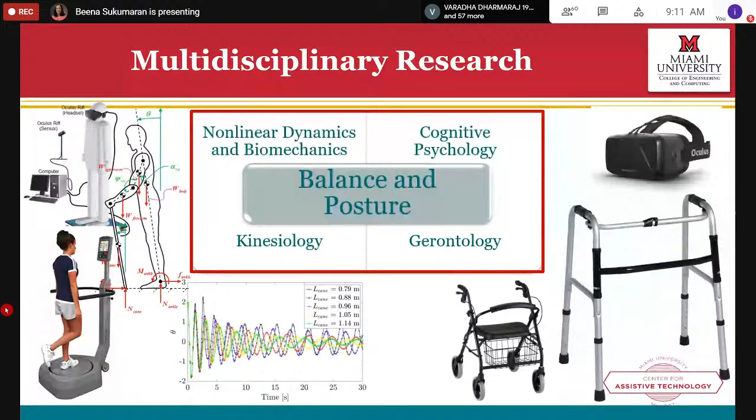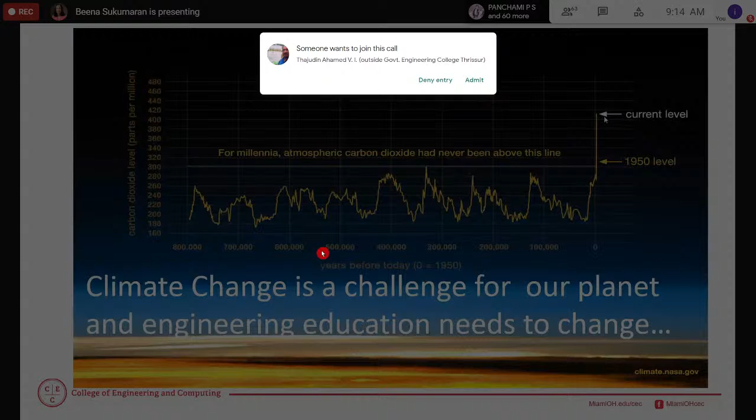So just to give you an overview of what is going on with our planet, the temperatures on our planet have been increasing over the past few years, and you can see these are the carbon dioxide levels. What you see here is a steep climb in the emissions of carbon dioxide, and this is from NASA. So you can see till the 50s, we were at a very stable rate, and then you see this huge climb in carbon dioxide emissions. And carbon dioxide being a greenhouse gas, it has caused our planet to warm up. And that is the reason that we see a lot more severe storms, and that is something you can see on this slide here.

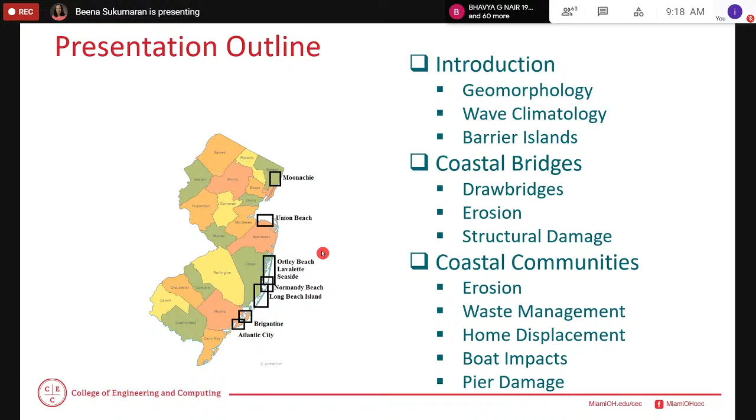But most of the damage was not near the eye of the storm, but in the surrounding areas, because the wind band for the storm was huge, and you can see that from the satellite image that you saw earlier. So if you look at the coastal hydrodynamics, it varies along New Jersey's coastline. There are 3 wave zones that you see. This is the southern end of the state, then this is the mid portion, and then the northern end. And here you also have these little inlets that go in.

And in fact, some of our team was concentrated in New York, both New York City as well as the surrounding communities. So the coast is divided into 3 zones of different wave climatology, and you see different levels of damage as a result of the storm surge. Ocean County, which is in the middle here, received a greater portion of the waves, which arrived directly onshore from the east and southeast. And it corresponded with the damage patterns that you see in the report.

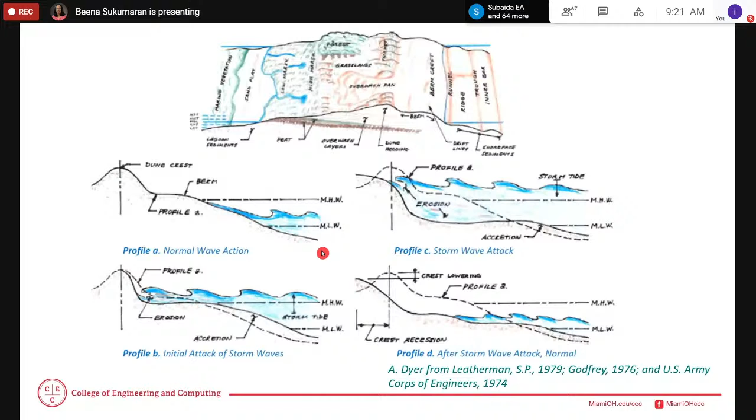So you can again take a look at the waves; this is normal wave action that you see. And then the storm actually coincided with high tide. So you had a huge storm surge, which caused a lot of erosion along the coastline, and as a result, collapse of some of these sand dunes along the barrier islands. And that is where we saw a lot of damage. So you can see what the tidal surges here are.

I hear a bit of noise in the background. Ma'am, someone has switched on their mic by mistake. Okay. We'll be asking them to switch it off. Okay, thank you. Ma'am, please continue. Sorry for the disturbance.

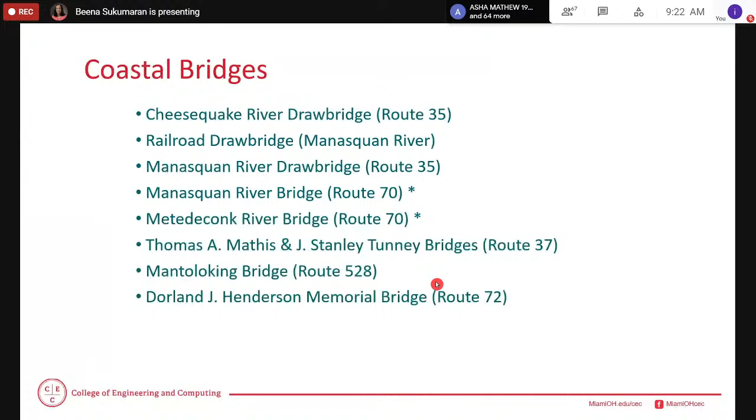So these were some of the coastal bridges that we visited. They were a mix of drawbridges as well as other bridges, and I'll talk about some of them. The reason that we visited the bridges is because bridges are lifeline structures. They connect communities, and if the bridges are destroyed, that means you can't provide emergency assistance. And so these tend to be critical structures that we have to be careful about.

So I will start with the Cheesequake River Drawbridge. This is on Route 35, and I know this doesn't mean much. It connects 2 communities called Sayreville and Old Bridge. And it was one of 8 bridges that we visited. The recorded storm damage was collected by the New Jersey Department of Transportation.

The barrier gate arm also had some damage from the wind, and it underwent a $25 million restoration project, completed in fall 2013, which included repairing the bridge decks, the side walls, the railings, and the median. This was the second bridge that we visited.

It's a railroad drawbridge, and it crosses the Manasquan River, connecting the communities of Manasquan and Brielle to Point Pleasant Beach. This bridge is at a relatively low elevation, with its stringers actually 3 to 4 feet above the water.

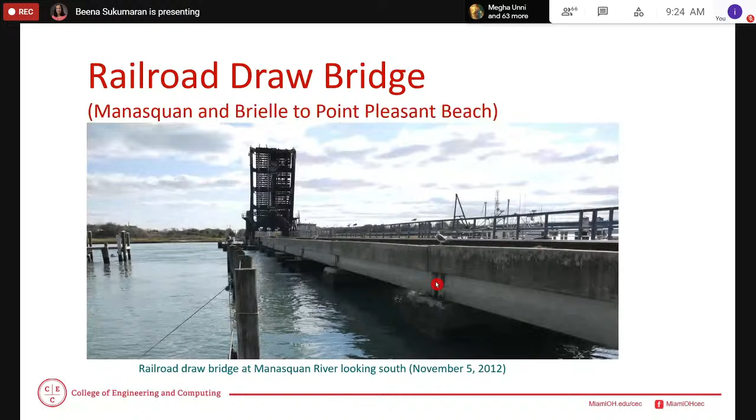Our team only assessed the north abutment and found that there was no structural damage. However, based on the surrounding piers, it was suspected there was moderate flood damage in other areas, but we couldn't visit the whole bridge because we were not given access at that time.

We also visited the Mathis and Tunney bridges, located in a township called Toms River, spanning Barnegat Bay to Seaside Heights. Mathis Bridge is a girder bridge with a drawbridge at midspan to allow for ship traffic. It was closed during the visit due to electrical damage to the drawbridge, and it was also missing a bearing from one of the stringers.

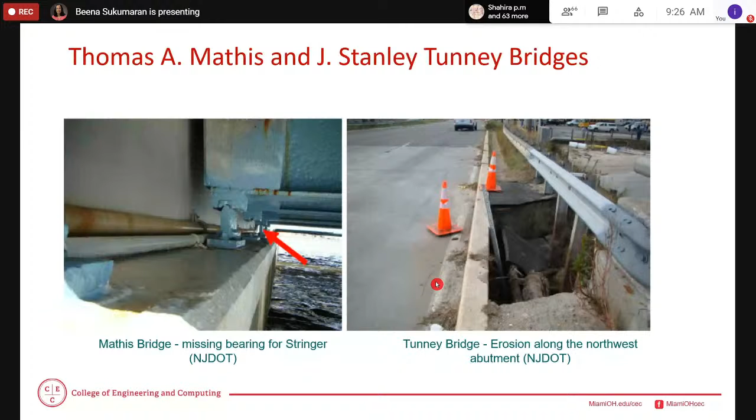The Mantoloking Bridge was the one that was severely damaged. We could not visit it because it was not safe, so these pictures actually came from the county itself. The substructure for this bridge, each foundation, is 5 concrete-filled pipe piles. The superstructure was a reinforced concrete slab, and 2 steel sheet pile coffer dams support the bascule piers.

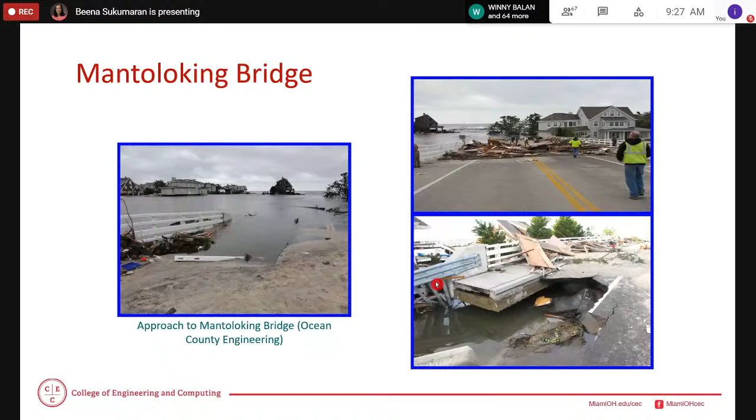The breach here opened up between Barnegat Bay and the Atlantic Ocean. You can see the extreme flooding, erosion, and large floating debris, which caused the loss of the T-wall as well as the destruction seen in this bottom right figure. This was a bridge that had to be completely rebuilt.

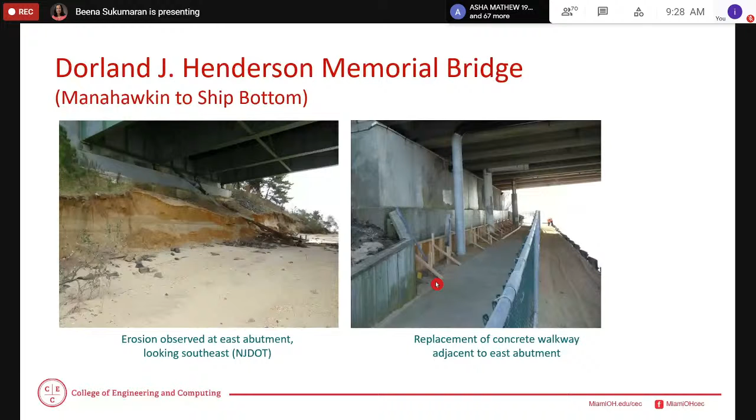This was another bridge that we visited. It's a steel precast concrete bridge on concrete abutments, with some portions supported by timber pile bents. This suffered significant damage on both east and west abutments, but it still did not undermine the whole foundation. So it did have some erosion damage, but all it required was some reconstruction of the walkway, some repair of the abutments, but no major structural damage.

We also visited lots of coastal communities. In fact, I visited some of these after the team had left also. I started with Atlantic City, which was very close to where I lived, so I went down there first.

In Atlantic City, we have a boardwalk along the beach. You can see this was already damaged even before the storm, but what the storm had done was taken some of these sections out. The high water mark here was about 2 meters above sea level. The bulkheads run along the section of the shore, and it had been breached in 3 locations.

The bulkheads that are used here are wooden bulkheads with tie rods that are attached to deadman anchors, and the pilings for the bulkheads are at 5 feet intervals.

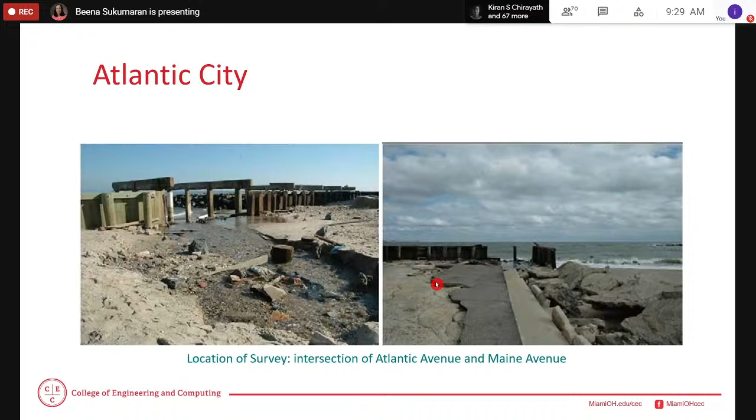The breaches resulted from damage to the facing and the piles, which had been washed away. As a result of the storm surge and water washing in through the breaches, the tie rods and the dead man were exposed and severely corroded. You can see some of the severe corrosion that happened here, and what it has done—it has undermined this whole area, causing sinkholes to form and some natural demolition. The ocean took away some of these portions here.

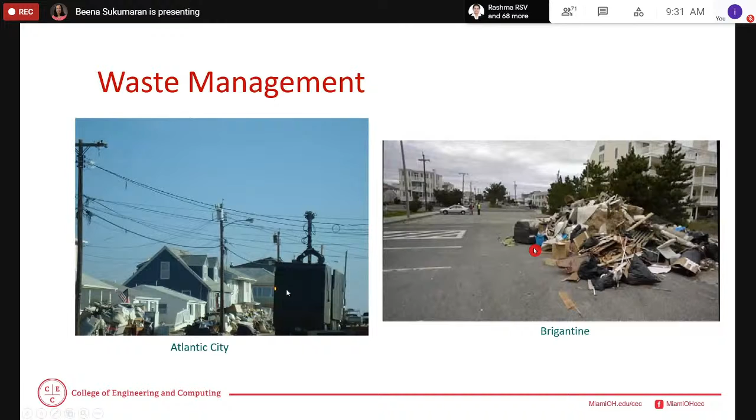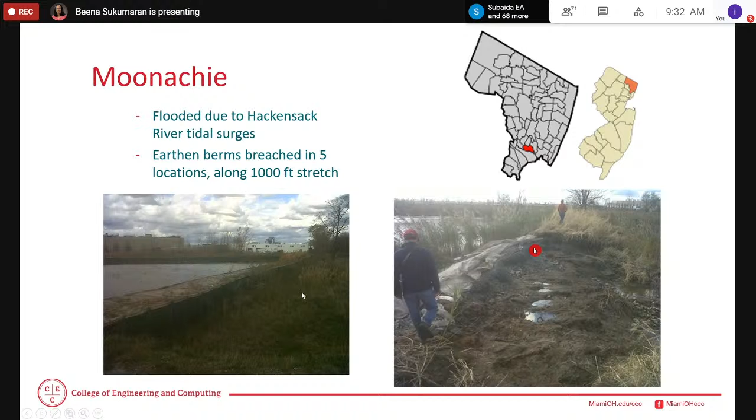Moonachie is an area that is actually interior, not along the shore, but along a river. Because of the storm surge from the ocean, the water in the river backed up, causing flooding in the communities around the rivers as well. You had earthen berms that were breached in 5 locations, and a whole community here had to be evacuated because of these breaches.

The other thing that happened was the pipeline. We had natural gas pipelines along these berms, and the buoyant forces from the water caused these pipelines to float up and rupture. The repair was to place concrete pads to weigh them down so that in future these buoyant forces wouldn't be able to raise them and cause rupture. These are two areas we visited after some time, because we couldn't even access them for a long time due to natural gas pipeline leaks and fires. We could only go here a month after the storm.

This is in the midsection of New Jersey, the area called Seaside, Long Beach Island, in Ocean County. You can see this aerial view of the area and all the damage, especially close to the shoreline. As you went away from the shoreline towards the Bay Area, you didn't see as much damage.

Sand was displaced, blocks from the ocean, and it was mostly on the ocean side. The vegetated beaches actually suffered little damage on the bay side, the opposite side. Soil erosion coupled with storm forces pushed over traffic signals and utility poles, and you can see big sinkholes develop as a result of some of the erosion.

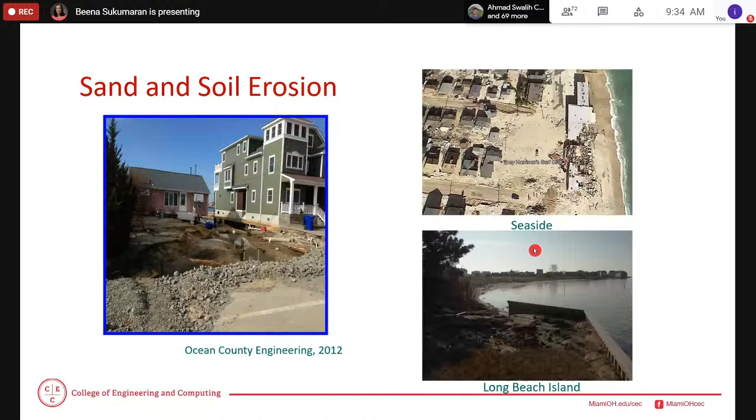In Long Beach Island, soil was washed out from under the sheet piles, and this compromised the stability of these earth walls. These were the kind of damage you would observe in these communities, and these are some of the residential homes you see in this area.

I'm standing here, and this house you see was actually on these piles. It had been sheared off the piles—it was 2 floors, and 1 floor had been completely washed away, and the owner didn't even know where that home had ended up. While this adjacent property withstood the storm with absolutely no damage. So you can see it varied, depending on how things were constructed.

Homes that were constructed on shallow foundations were shifted or even displaced several feet off the foundation. The dynamic water forces destroyed the first floor in many homes and left upper stories intact. In Long Beach Island, in fact, half the homes had flooding and few had very significant structural damage.

So you can see that when you build in these areas, you have to put them on piles. But these piles also have to be designed for sufficient lateral forces such that they will withstand some of these storm forces.

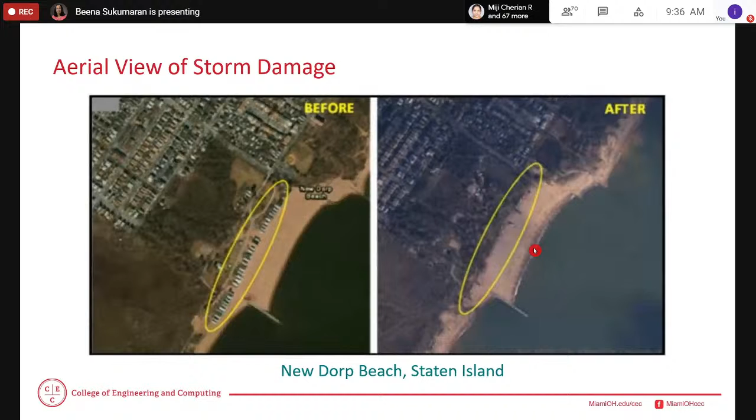The other damage that we saw a lot of is boat impacts. Lots of people have these boats that are moored along the shore, and these had come untethered. So they were just floating around and impacted homes. Some even got wedged between homes, and it caused a lot of damage to the area.

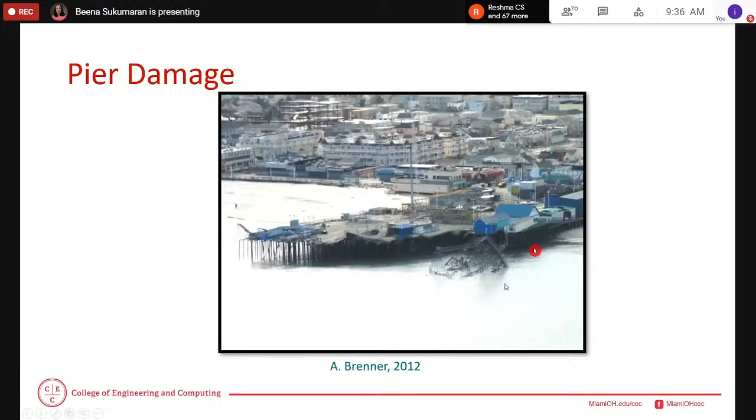This was another one. This is actually an area called Seaside Heights, and this is a very famous pier in Seaside Heights - it's an amusement park. Part of the pier deck was detached, and it was completely destroyed and claimed by the ocean. So some significant damage there.

So just in summary, some of the damages that we observed were: in drawbridges, electrical systems were damaged. There was erosion of bridge abutments. We saw some breaches, pipeline damage, and waste generation - a huge volume of waste generated. Boat impacts was another thing we saw a lot of. Displacement of structures on shallow foundations, and then for some structures, even shearing off pile foundations.

So what are some immediate solutions, especially for a warming planet, as we build along communities? If you ask me, should we have built on the barrier islands in New Jersey, I would say it's not a very good idea, because the barrier islands are almost like shifting dunes. They tend to move as storms come in, and they have a tendency to move towards the mainland. So these are like shifting sand dunes, and constructing on that is not a great idea.

But if you were to do that, what are some of our solutions? For New York City, we are thinking of putting flood barriers, surge-resistant foundations - these are pile foundations, right - and hardening infrastructure. When we talk about hardening infrastructure, we're talking about how quickly can we bounce back after a storm, and how can we minimize some of the damage?

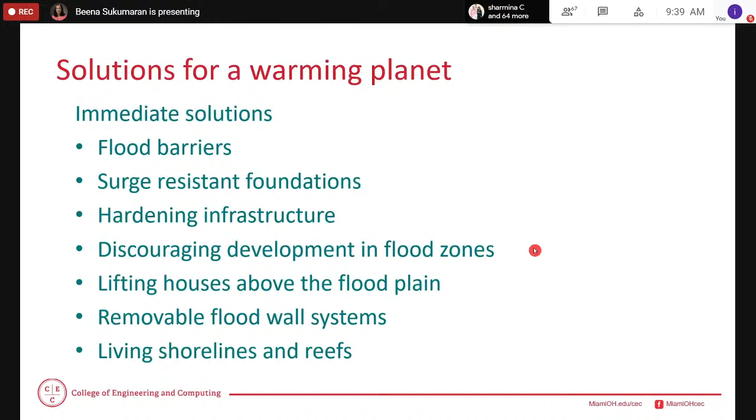Removable flood wall systems - you see that being done in London, in Venice, lots of areas of the world. In the Netherlands, they've had it for a long time. But then, are we moving the problem somewhere else? So the other thought is to have living shorelines and reefs, using natural defenses - are those the better things to do?

Heating and air conditioning units had to be raised. If not, the flood insurance became very expensive. Lots of homes, like I mentioned earlier, were bought out by the government, by the state governments. In New Jersey, it was something called the Blue Acres program.

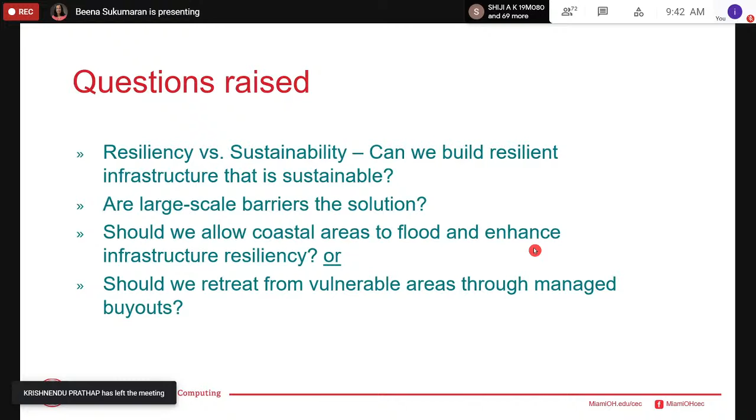And then, are large-scale barriers a solution? I'm not sure if that's the solution because you're just shifting the problem somewhere else. Should we allow for coastal areas to flood and enhance infrastructure resiliency? Or should we retreat from these vulnerable areas through managed buyouts? And I know that in lots of areas, it's not possible to do that, right? So these are questions that we need to tackle.

So with that being said, when we think about educating the next generation of engineers, I would say ethics is a huge component that we should place a huge emphasis on. And the reason is that we want our graduates to speak up and to talk about the impact of climate change and to challenge it. Sometimes you have to challenge political forces and so on to say maybe these are not the best areas to build in. And maybe we need to sacrifice some of that economic development so that we live more sustainably.

The other thing that I think engineers should have are good communication skills. I think those are critical because we need to formulate policy, right? And then, you never stop learning, so you have to be lifelong learners. And as you can see now, because of the pandemic, all of us have become very good at asynchronous learning. So you're learning things online, you're learning things asynchronously from your faculty members as well as from others.

And then I think it's good for you to put things in practice while you're still in school through service learning by helping communities in need and so on. So those are your hands-on and project-based learning. And I'm a big advocate of that.

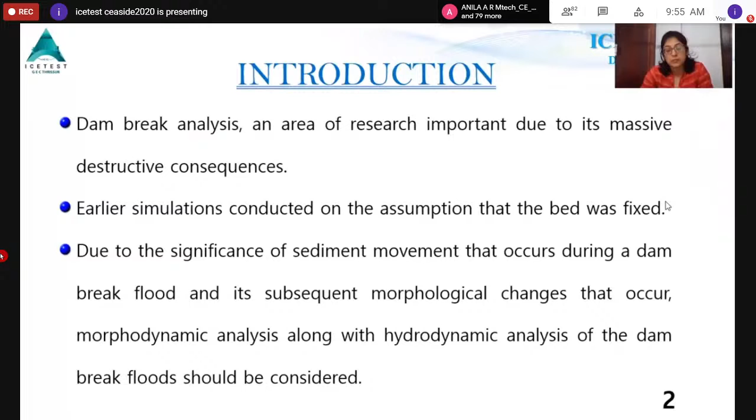Earlier simulations used to be done assuming that the bed was fixed, but due to the significant sediment transport that occurs during a dam break flood and the subsequent morphological changes, morphodynamic analysis is also considered along with hydrodynamic analysis when a dam break flood is considered. Now, for any numerical model, it is necessary that we calibrate and validate it. But dam break study is one such domain where there is very little observed data for verifying it against the actual event that has happened.

So in such cases, we make use of experimental setups to reproduce a scaled version of the dam break incident and then validate the numerical model so that it can be used to forecast the actual event. Now, my study also makes use of an experimental setup that has been provided by Frazao et al. and Wu et al. Frazao and team have provided a benchmark test case for the validation of numerical models doing dam break analysis over mobile beds.

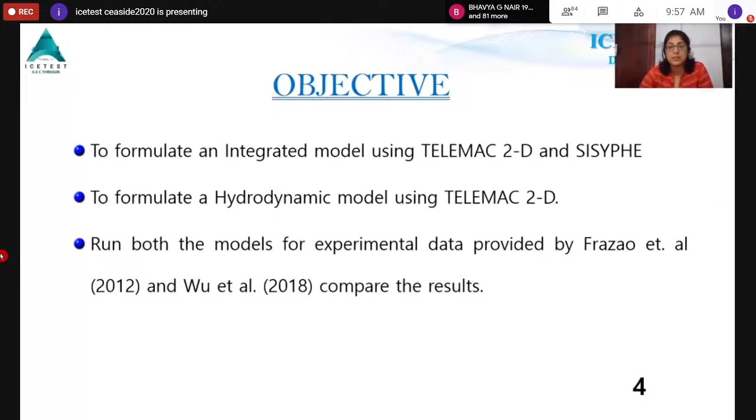My study is an attempt to compare the performance of a hydrodynamic dam break model and an integrated model using this experimental data. After an extensive literature review, the specific objectives formulated were: to formulate an integrated model using the two modules of the TELEMAC-MASCARET software, TELEMAC-2D and SISYPHE. TELEMAC-2D deals with hydrodynamic analysis and SISYPHE with sediment transport. To formulate a hydrodynamic model using only TELEMAC-2D, run both the models for the experimental data provided by Frazao and team, and compare the results.

I'm giving a brief idea about the numerical model and theoretical background behind it. The Open TELEMAC-MASCARET software might be a new name to many. It is a modeling tool for use in the field of free surface flows, written in Fortran with certain scripts in Python as well. There are various modules to it, and I have used TELEMAC-2D, which does the hydrodynamic analysis of free surface flows, and SISYPHE, which does the sediment transport analysis, and coupled them with the inbuilt coupling mechanism in the software for my study.

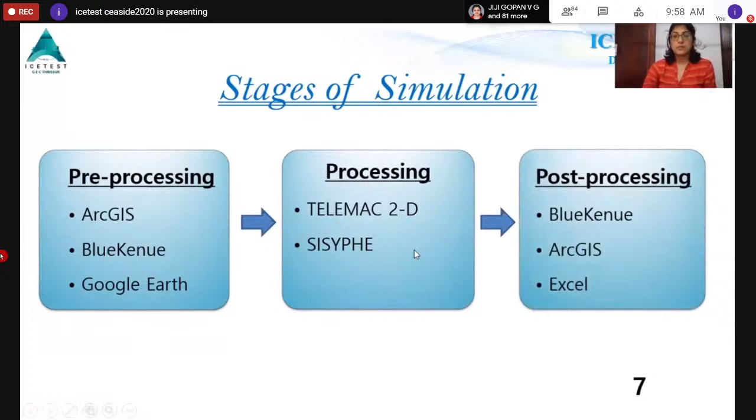Now, the entire numerical simulation can be phased into three stages. First is the pre-processing phase, making use of ArcGIS, BlueKenue, and Google Earth to create the geometry, the bathymetry file, and the necessary input parameter files so that it is ready for the processing phase. In the processing phase, this model is run using TELEMAC-2D and SISYPHE. After that, in the post-processing phase, we make use of software like BlueKenue, ArcGIS, and Excel to do the result analysis as per our requirement.

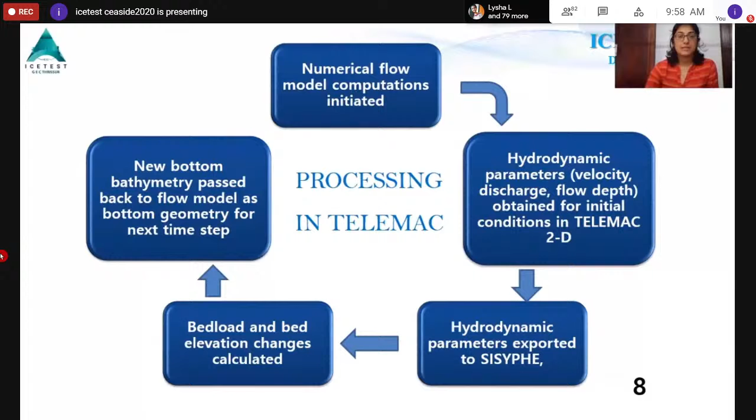Now, in the software, first we initialize these computations with certain initial conditions, and TELEMAC-2D will compute the hydrodynamic parameters and export them to SISYPHE. SISYPHE is going to compute the bed load and bed elevation changes and modify the bottom geometry, and this modified geometry is then passed on to the next time step for the subsequent numerical computations, and this continues until the end of the simulation period.

The hydrodynamic equations used are the non-conservative form of the shallow water equations, and the sediment transport equation is the Meyer-Peter-Müller equation for bed load transport, and bed evolution is done using the Exner equation. Now, the methodology adopted here is first studying the geometry from the paper, and all the data needed for numerical modeling is available in the paper, with the flume geometry, the plan, cross section elevations, and the sediment properties.

The Manning's coefficients adopted, the thickness of the sediment bed, the area where the sediment is located. The dam is represented by a gate that is 1 meter wide in between two impervious blocks, and the upstream of the gate is considered as the reservoir portion, and downstream the downstream area. And all this is modeled in our software as well.

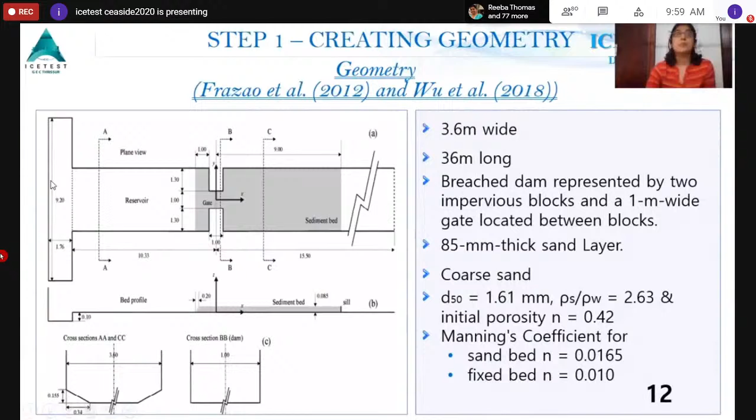After that, there are 8 gauge points located downstream of the dam, which take the measurements of water levels at the end of the experiment. And these water levels are used for the comparison of two models. The dam break wave is triggered by rapidly pulling up the gate for a period of 20 seconds, after which the gate is lowered, and it is done for an initial condition of 0.47 meters at the upstream of the dam and 0 meter, that is dry bed condition, at the downstream of the dam.

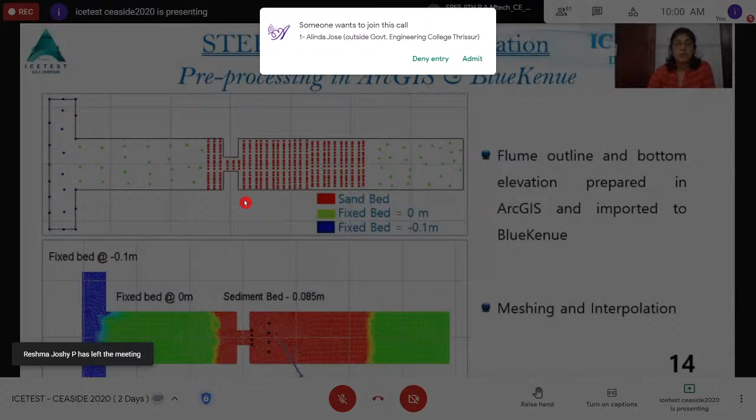While numerically modeling, we do pre-processing by creating the geometry and bottom bathymetry file in ArcGIS, importing it to BlueKenue, interpolating the bottom geometry with the actual bottom elevation with the flume geometry, and meshing the domain. After that, we provide the initial conditions of 0.47 meter upstream and 0 meter downstream, the Manning's coefficient at the sand bed equal to 0.0165 and in the fixed bed 0.01, and the boundary conditions, which are a solid boundary condition at the upstream and free outflow boundary at the downstream.

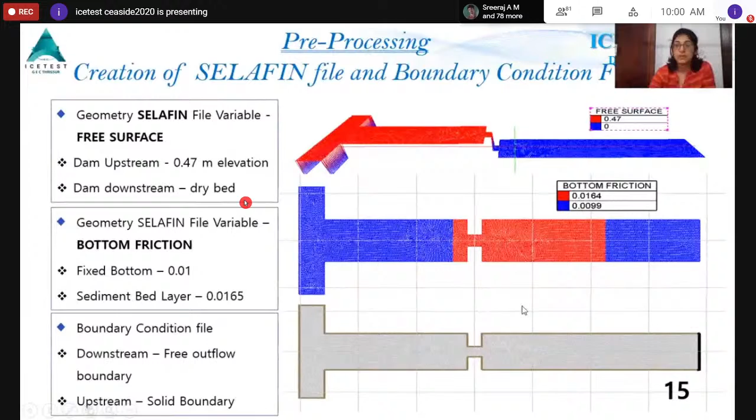So all of these data are compiled into a text file with an extension .cas, and it is run in the Telemac software, which has the MS-DOS command prompt window, along with the command telemac2d.py and the name of the steering file or the input file. After processing, the binary format is available, which can be post-processed according to our requirement.

And for our study, it was required that we compare the hydrodynamic and integrated models by comparing the water levels of both the models with that of the experimental setup at 8 gauge points, as well as the bed levels of the integrated model with the experimental data at 3 longitudinal axes to see if the model is able to depict the morphological changes properly.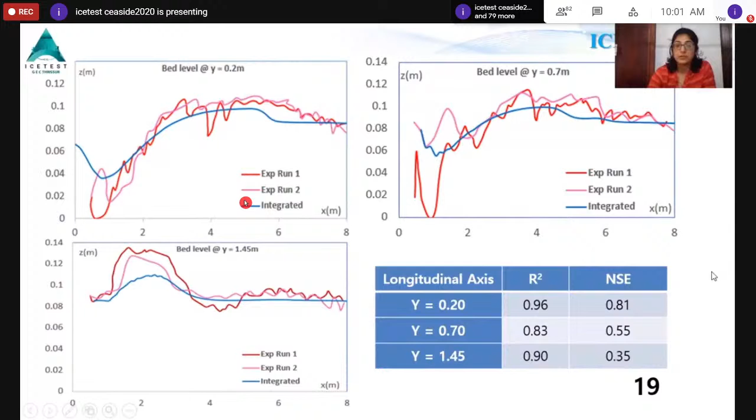Moving on to the water level comparison, which is the comparative factor for the hydrodynamic and integrated model with the experimental data. It is first done at the immediate downstream gauge points, which are 4 in number, and then at the 4 gauges further downstream.

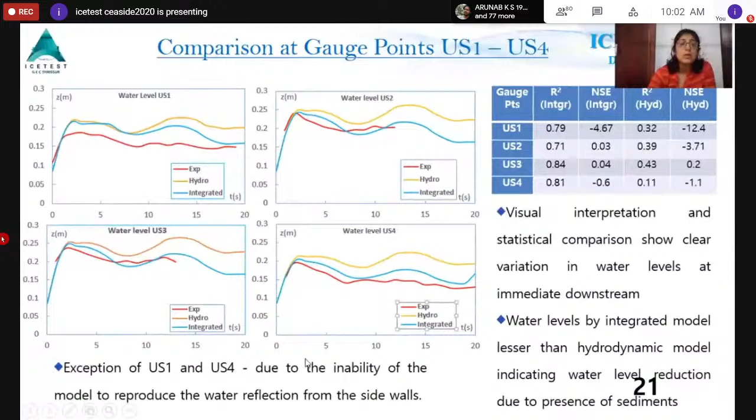And first, if we check out the comparison at US1 to US4, we see a clear overestimation of water levels by both the models. But in US2 and US3, we see that the integrated model is giving a good agreement of result with the experimental setup, whereas the hydrodynamic model in all 4 cases is predicting higher water levels. So the reduced water level by the integrated model is indicating the water level reduction due to the presence of sediments. And for US1 and US4, the exception might probably be the inability of the model to reproduce water reflection from the side walls.

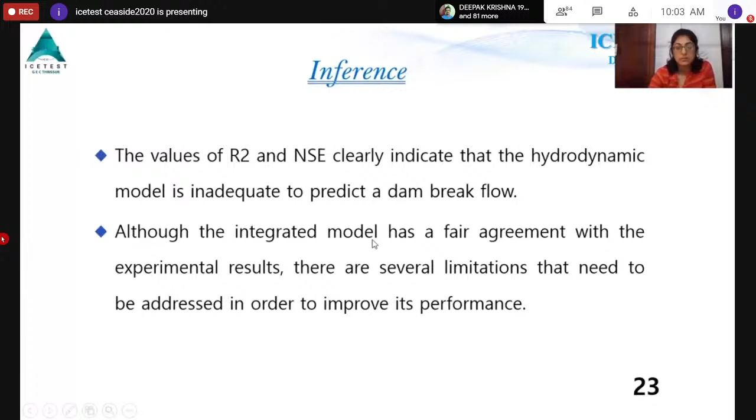Thus, concluding, the study is an attempt to prepare a 2-dimensional dam break model using Telemac-Mascaret software. A hydrodynamic model was formulated using Telemac 2D, and an integrated model was formulated coupling Telemac 2D and Sisyphe.

The integrated model was run using the bed load transport equation with the non-cohesive property of the sediments. Both of the models are able to simulate unsteady flow, but the comparison yielded the result that the integrated model is better performing. The integrated model is also able to predict morphological changes depicting scouring and transport deposition.

Integrated model results are showing fair agreement with the experimental results, but whatever discrepancies can be attributed to the rough calibration of the friction coefficient, Manning's coefficient, which is an indicative value as mentioned in the paper, as well as the bed material sizes, which they say is also an indicative value. Both they have mentioned in the paper itself. This work was used as a preliminary step for the validation study of a two-dimensional dam break analysis using an integrated model. These are the references.

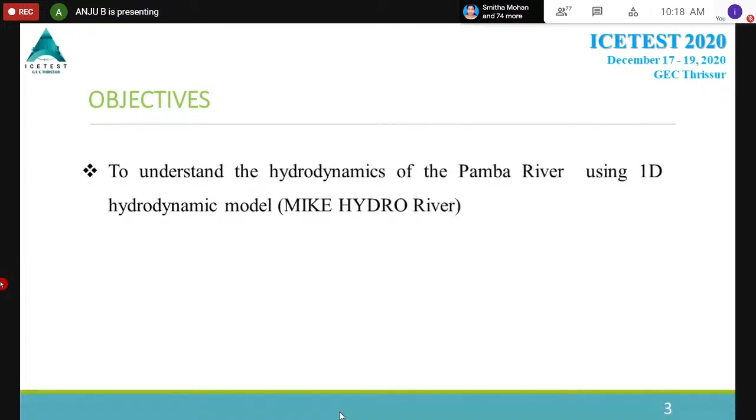Moving to the introduction, a flood is an overflow of water that submerges the land that is usually dry, and it results in large losses and damages. Its main causes are heavy rainfall and human activities. With the extreme shift in land use pattern and rainfall trend, a thorough assessment of flood is necessary. Flood modeling gives the prediction of flood extent and depth, and it gives the assessment of risk to life and property in the floodplain. The objective is to understand the hydrodynamics of Pamba River using a one-dimensional hydrodynamic model.

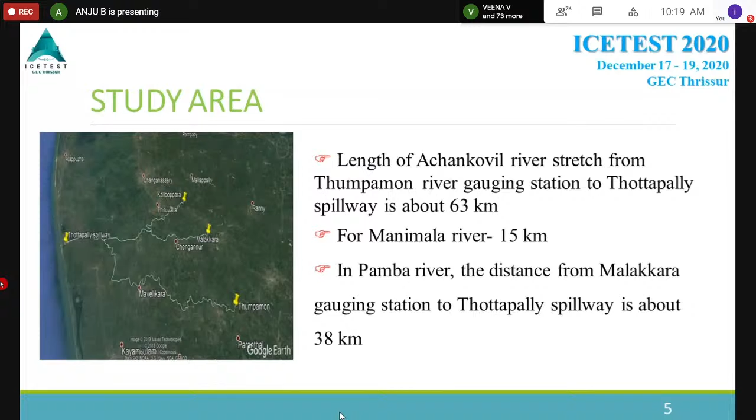The length of Achenkovil River considered for the study is about 63 kilometers, for Manimala it is 15 kilometers, and Pamba 38 kilometers. The data required are time series of daily discharge and water level of different gauging stations, and it is obtained from Central Water Commission. Second is the river cross section, which is extracted from DEM, and SRTM DEM with 30-meter resolution is downloaded from USGS.

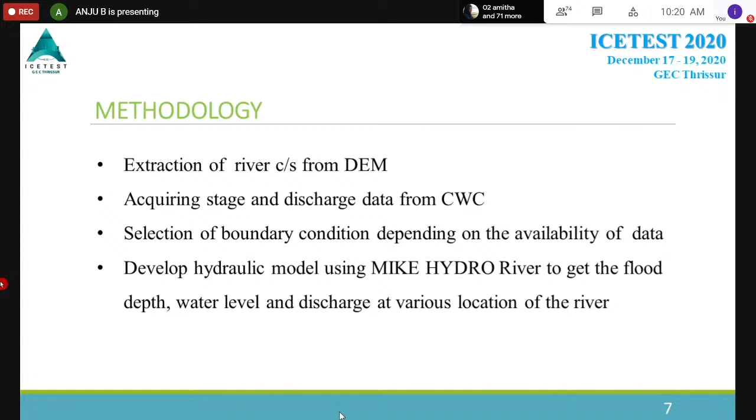Then moving to the methodology. First is the extraction of river cross section from DEM, then acquiring the stage discharge data from Central Water Commission, then selection of boundary condition depending upon the availability of the data, then developing the hydraulic model using MIKE Hydro River to get the flood depth, water level and discharge at various locations of the river. MIKE Hydro River is a one-dimensional unsteady non-uniform flow model developed by the Danish Hydraulic Institute. It solves the one-dimensional hyperbolic dynamic Saint-Venant equations with an implicit finite difference method. The Saint-Venant equations representing conservation of mass and momentum are given below.

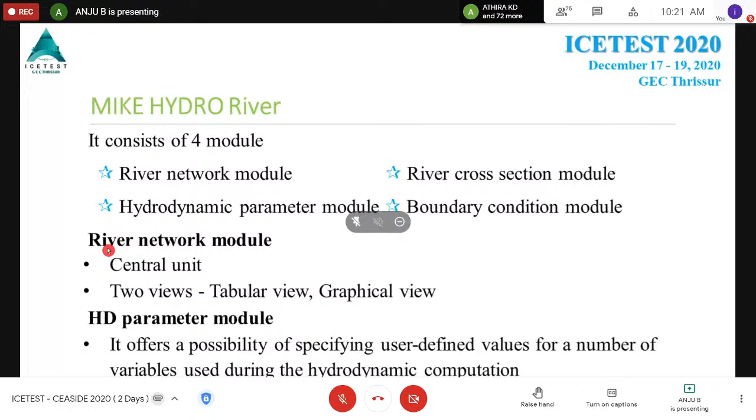MIKE Hydro River consists of 4 modules: River Network Module, Hydrodynamic Parameter Module, River Cross-Section Module, and Boundary Condition Module. The first one is the River Network Module. It is a central unit. It has 2 views, that is tabular view and graphical view. The second one is the Hydrodynamic Parameter Module and it offers the possibility of specifying user-defined values for a number of variables used during the hydrodynamic computation.

The third one is the river cross-section module, which is the most important of the 4 modules, and it has 2 data sets, that is raw data and processed data. The raw data describes the physical shape of the cross-section, and the processed data is calculated from the raw data and contains the corresponding values for water level, cross-sectional area, flow width, and hydraulic radius. The last is the boundary condition module. It requires both time series editor and boundary editor. It also has 2 views, that is tabular view and graphical view.

Then coming to the results and discussions. First is the calibration of MIKE Hydro River. Initially, the Manning's coefficient value is given as 0.033. Then using this value, the model was run. Then the Manning's coefficient is given differently for different stretches of rivers, and the value ranges between 0.03 and 0.06.

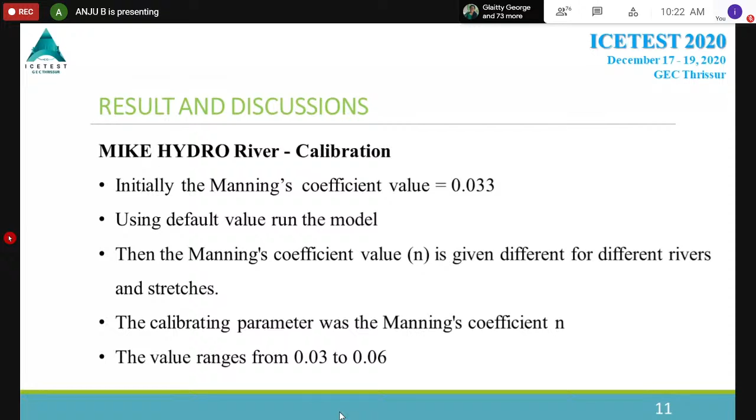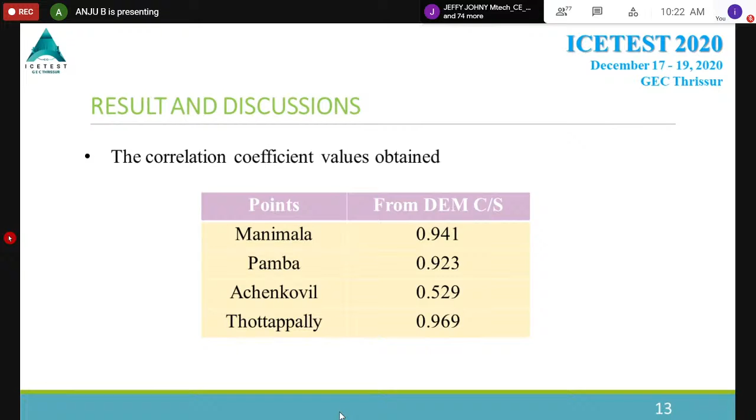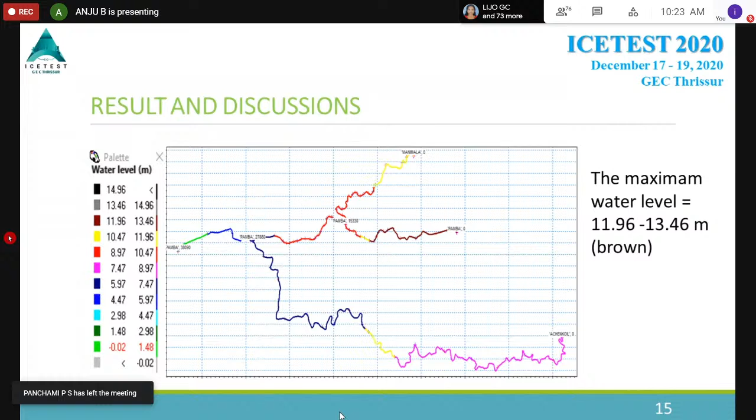Coming to the conclusion, the water level and discharge simulated is satisfactory with the observed values, and the downstream correlation coefficient value obtained is higher compared to the upstream. The variation in the observed and simulated water levels are due to the different datum used for measurement.

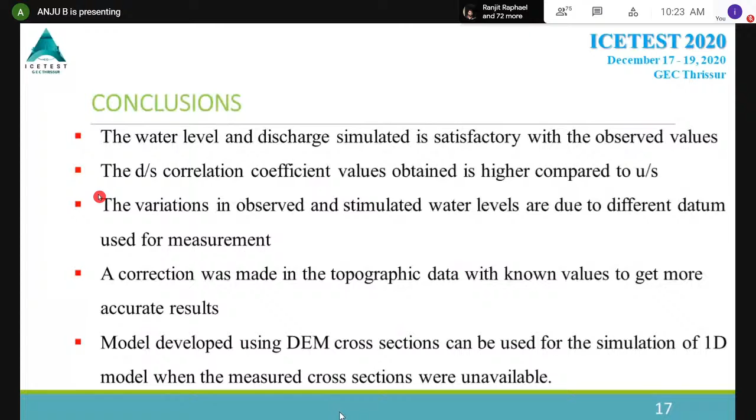A correction was made in the topographic data with the known values to get more accurate result. The model developed using DEM cross sections can be used for simulation of one-dimensional model when the measured cross sections were unavailable. These are the references. Thank you.

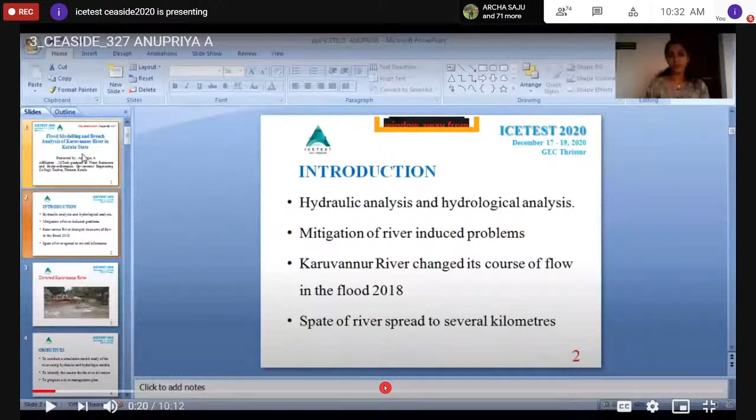Now her sound is very feeble. Anupriya, presentation also not visible. Presentation is visible. Sir, Anupriya, could you please do the live presentation, please? Can you hear me? Yes, you're audible now. Yes, I can share. You can share your PPT now. Okay.

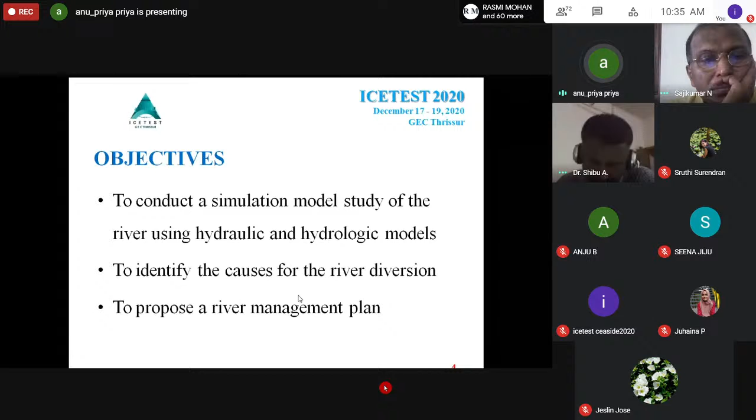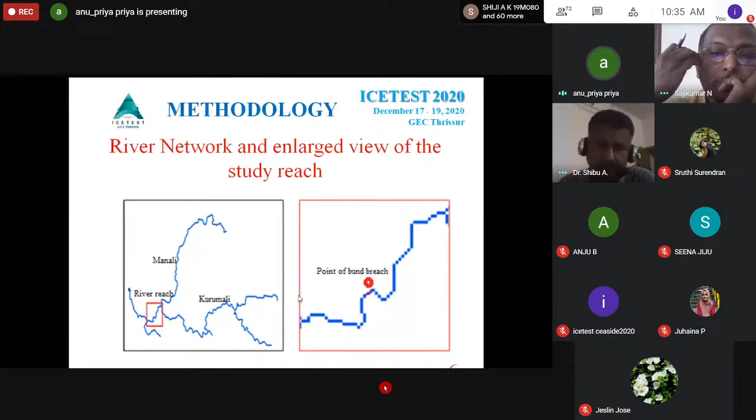Coming to the methodology: in order to find the causative factors for the river diversion and bund breach, a small stretch is used for the study, that is a 5.460 kilometer reach in which the bund breach actually occurred was selected. The red point in the enlarged view of the study reach indicates the point of bund breach, and for the modeling, the junction point of Manali and Kurumali River is used as the upstream endpoint.

The 2D modeling of the river was done using HEC-RAS 5.0 software, and the important input data are cross-section data, upstream boundary conditions, and downstream boundary conditions.

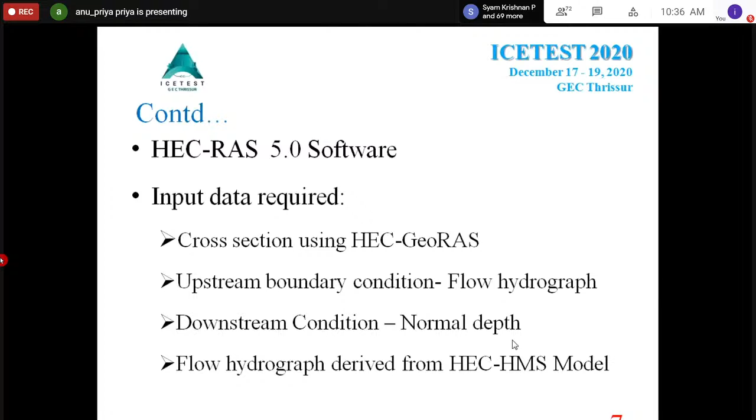After the results are obtained, both models are calibrated and validated using the daily discharge data from the Irrigation Design and Research Board, Trivandrum. In the HEC-RAS model, the calibrated Manning's n value for the river is 0.04 and for the banks is 0.06.

Using the modeling results, a proper river management plan could be proposed. This figure shows the calibration and validation graphs of the HEC-HMS and HEC-RAS models.

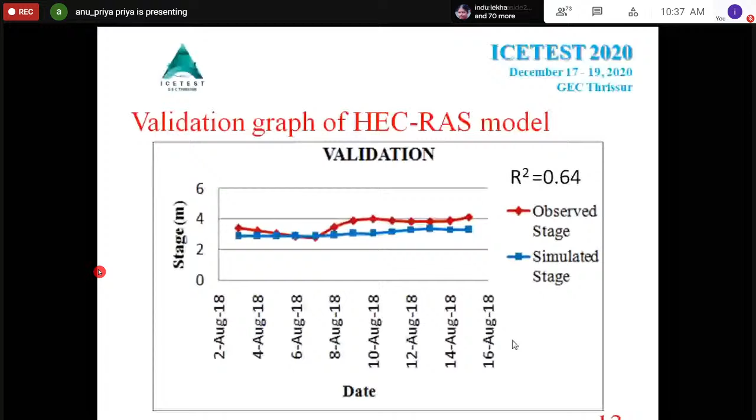One more point is this graph shows the flow hydrograph only due to rainfall. So the average annual discharge value of the stream is to be added to these values, and it is to be given for the HEC-RAS model.

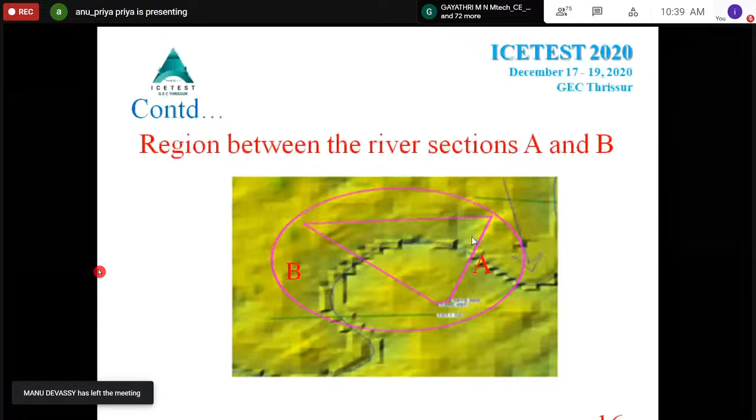In order to find the maximum flow and the shear stress or other properties, a region between river sections A and B is selected. Here the maximum flow obtained is nearly equal to 750 meter cube per second.

This is the bed shear stress at sections A and B. One more point is, bed shear stress is also an important parameter, because as the bed shear stress increases with increase in velocity, the scouring action also increases. This leads to the entire bank failure, which is also a main reason for the river diversion and bund breach.

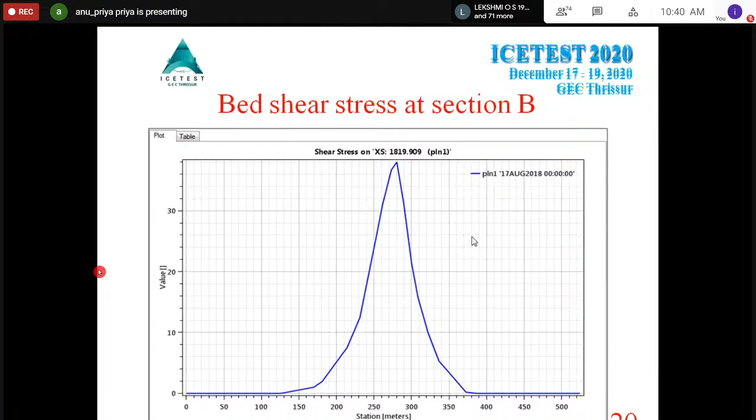So the wide spreading of water over the large low-lying areas can be prevented by proposing a proper river management plan, or by constructing a river management work. In this study, I have proposed construction of a levee, and as I told, the maximum depth of water or maximum water surface elevation in this river with respect to the channel bottom is 15 meter.

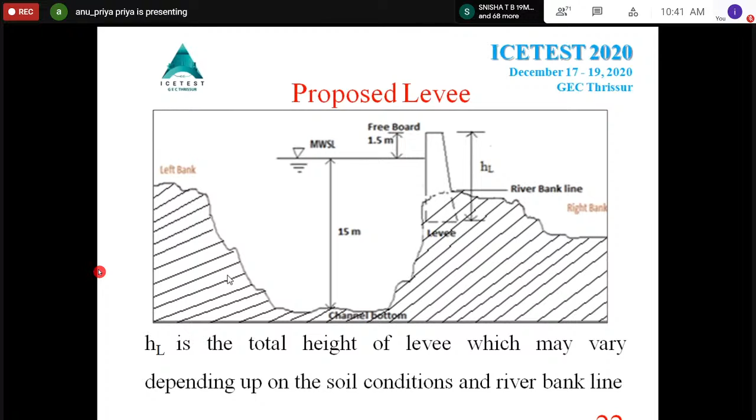So, including providing an extra 1.5 meter as freeboard, the top of the levee should be at 16.5 meter from the channel bottom. The total height of the levee cannot be determined exactly, because information about soil conditions and river bank line is not available, so it depends on those factors.

Coming to the conclusion, variations in discharge, bed shear stress, and other flow properties led to the river diversion and bund breach. When the water with enormous discharge entered through the highly curved portion of the river, a tangential force was developed, and the sidebanks of the river were weakened, causing overflow of the river towards the right bank and the bund breach.

Construction of a levee on the right bank is proposed, with the top of the levee at 16.5 meter from the channel bottom, including a freeboard of 1.5 meter.

One of the limitations in the study is insufficient data, because the Manning's coefficient and cross section are assumed constant in this study. Also, the exact flow hydrograph was not available at that time, so I used the flow hydrograph derived from the rainfall-runoff model. This is one of the limitations in the study.

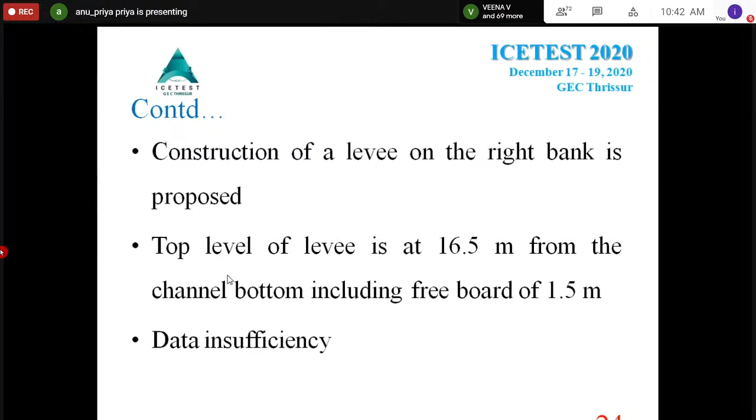Good morning. The topic of my presentation is simulation of flow pattern around series of groynes with different orientations in meandering channels. Myself, Indulekha KP, and my co-author is Sachin S. We are from College of Engineering, Trivandrum. The mechanism of flow and turbulence around groynes in a meandering channel is a very complex phenomenon. A better understanding of turbulent flow is needed to analyze sediment transport problems in meanders. The mean flow and turbulent distributions around these structures have to be analyzed properly. Groynes are normally used to prevent bank erosion and to keep the main channel navigable in natural rivers. The complexity of flow around these series of groynes increases with the development of scour in meanders.

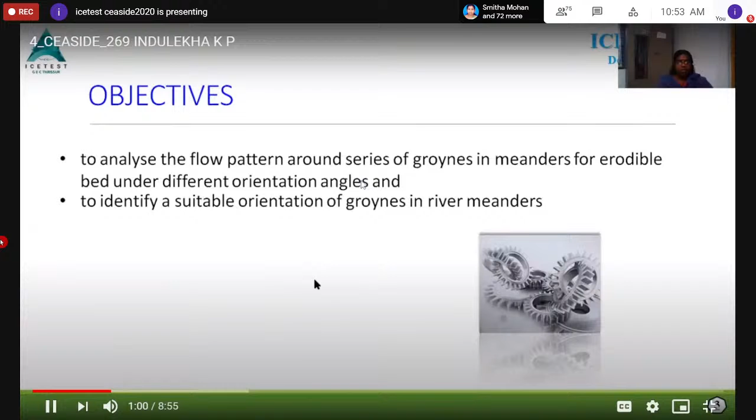So the objective of my study is to analyze the flow pattern around series of groynes in meanders for erodible bed under different orientation angles and to identify a suitable orientation of groynes in meanders. At first, physical experiments were conducted in a meandering flume featuring a meandering portion of the Vamanapuram river in Kerala, and the model was set up at the PG Hydraulics Laboratory of College of Engineering, Trivandrum. The curved portion of the river was selected and scaled down to a horizontal scale ratio of 1:60 and a vertical scale ratio of 1:20.

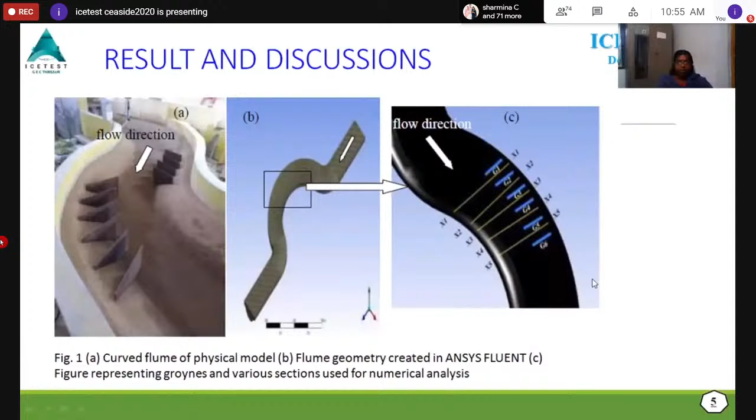The flume consists of three consecutive and opposite bends with angles 67 degree, 134 degree, and 67 degree, named bend 1, 2, and 3. The central angle of 134 degree in bend 2 represents a typical meandering geometry. The physical model has a cross section with a base width of 50 mm and a top width of 130 mm, and the side slope was 39 degree. Figure 1a shows the physical model in the laboratory, and the same flume was created in ANSYS Fluent, shown in figure 1b. 6 groynes were placed in bend 2 with a spacing by length ratio of 2.5 and at an angle of 45 degree. Figure 1c shows the position of groynes and the sections used for numerical analysis. The groynes were numbered G1 to G6 and sections X1 to X5.

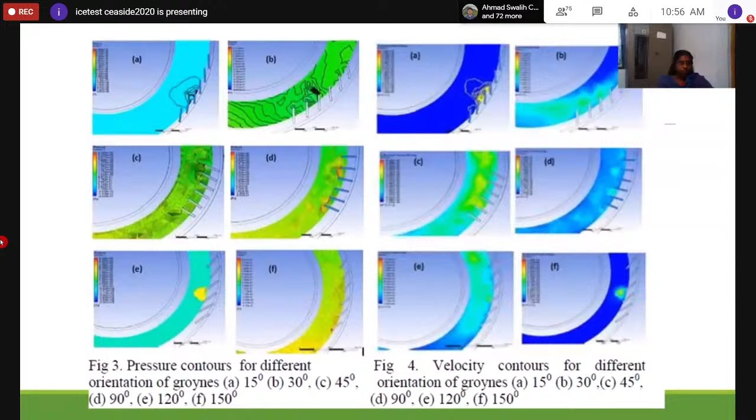The pressure contours were analyzed, and it is found that the maximum pressure was observed in the 150 degree orientation, and major pressure variation was observed around the third and fourth groin. The most pressure variation was observed for 90 degrees, and the variations were concentrated on the second, fifth, and sixth groins.

Figure 4 shows the velocity contours for different orientation of groynes, and from the contours it is found that the velocity was very low in the groin field for 15 degree and 150 degree alignment, but nearer to the groin tip a dynamic fluctuation in velocity was observed. For 30 degree and 45 degree, the velocity increases as it enters the groin field, and then it decreases after the groin field.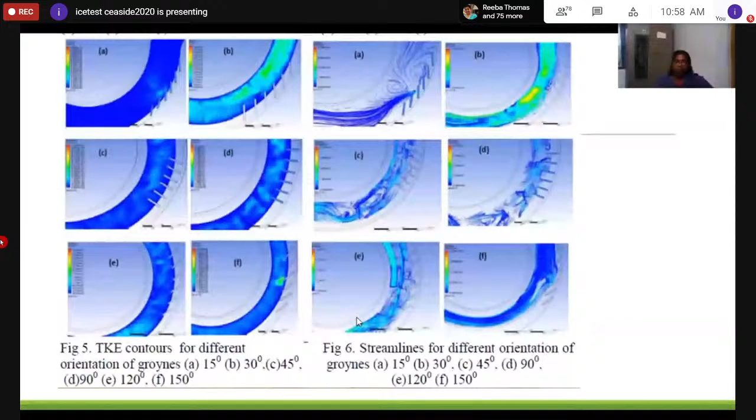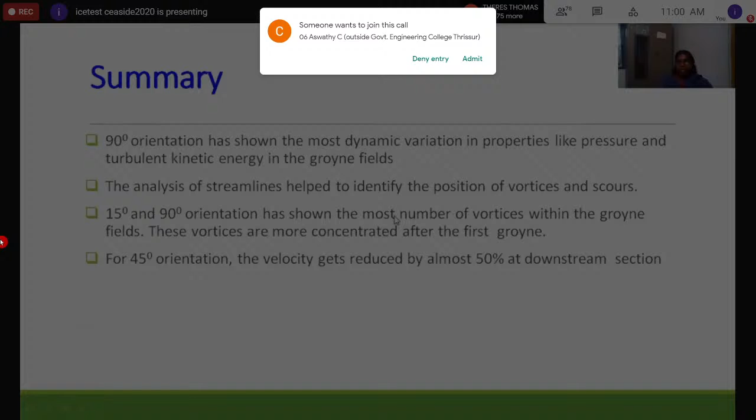From the modeling study, it can be summarized that 90 degree orientation has shown the most dynamic variation in properties like pressure and turbulent kinetic energy within the groin field. The analysis of streamlines helped to identify the position of vortices and thereby the position of scouring. 15 degree and 90 degree orientation have shown the most vortices within the groin field, and these vortices are more concentrated after the first groin. For 45 degree angle, the velocity gets reduced by almost 50% at the downstream of the first groin.

From the analysis, it can be concluded that numerical modeling is found to be very effective for the analysis of flow pattern around groins. Even though groins aligned at 15 degree and 150 degree with the bank showed the least effect on velocity, they cannot be used for river protection as they do not deflect the flow away from the banks. 90 degree orientation is not suitable in meanders as it has shown the most dynamic variation in pressure and turbulent kinetic energy within the groin field.

The maximum values of pressure, velocity, and turbulent kinetic energy were experienced at the tip of the groin. The ideal angle for controlling velocity was found to be 45 degree, as 30 to 50% reduction of velocity was observed when the flow reached downstream.

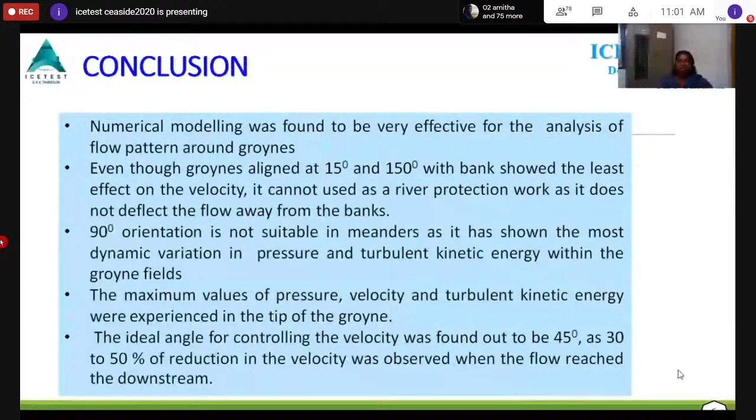Hello, Professor Indileka. Hello. Hello, sir.

Yeah, I have a few questions regarding the modeling process. What is the discretization level that is being used? Because discretization has a very high importance, especially in a numerical model, especially in Fluent. So you haven't mentioned anything regarding the discretization part.

Hello? Hello? Hello. Will you be able to hear me? Sir, hello?

Yeah, I would like to know the discretization part. How many elements, what is the size of the element, minimum size of the element and so on. Because in a numerical model, especially in Fluent, the discretization size of the element makes a lot of difference. Sir, the size of the element used is around 0.5 into 10 raised to minus 2. 0.005 into 10 raised to minus 2.

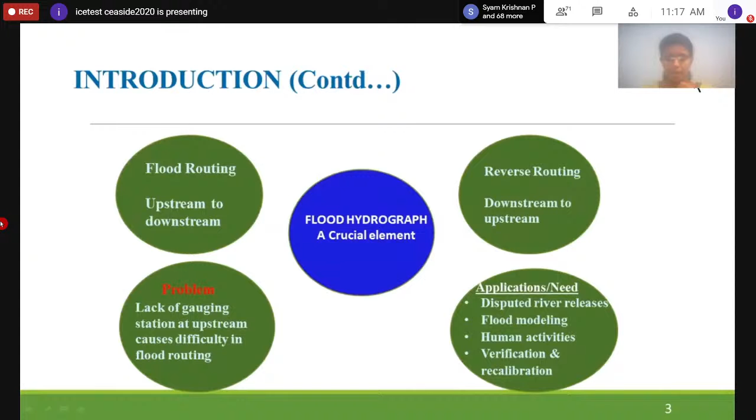And when we look into the literature, reverse routing is a less attended area in water resource studies. There were some studies previously. All these studies depended on the typical traditional reverse routing technique. In 2005, Dooge and Bruen conducted some reverse routing studies, and they concluded that the reverse routing process has the difficulties of an inverse problem. It is ill-posed, and the computations are always subject to instability.

As an Indian paper in 2009, Das suggested the need for fresh calibration of parameters if we are using the Muskingum models for reverse routing. And I looked into some recent studies. In 2015, Zucco et al. proposed a model for reverse routing using genetic algorithm, which is an artificial intelligence technique. In 2017, as an extension of the study conducted by Zucco et al. in 2015, Kaya et al. conducted a flood modeling study in Turkey by taking the methodology suggested in the previous paper.

And when we look into all these studies, we can see the studies are limited in the reverse routing area due to the practical difficulties, and the later studies adopt either statistical or artificial intelligence methods for easiness. My aim of doing this work is to check the adaptability of the reverse routing process suggested by Zucco et al. in 2015 and Kaya et al. in 2017 in Indian conditions, by taking the example of one of the most flood affected rivers in Kerala during 2018.

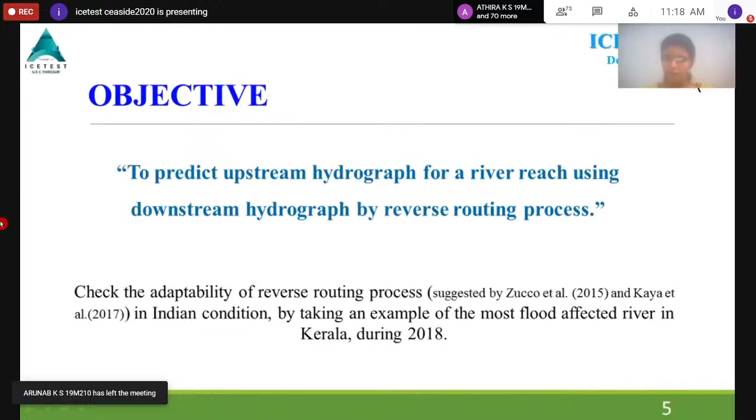That is, my objective is to predict the upstream hydrograph for a river reach using the downstream hydrograph by a reverse routing process. My methodology comes under three main headings. First of all, it is the identification of study area. Next one is the data collection and analysis. And the third one is the reverse routing model.

The study area selected is Chalakudy River, and Chalakudy town is located on the banks of this river. There was flood in 2018 and 2019. It indicates a possibility of flood in future also. The Chalakudy River is a tributary of Periyar River, and it is the fifth largest river in Kerala. It has a drainage area of 1,704 square kilometers in total, of which 1,404 is located in Kerala. It has a length of about 145.5 kilometers.

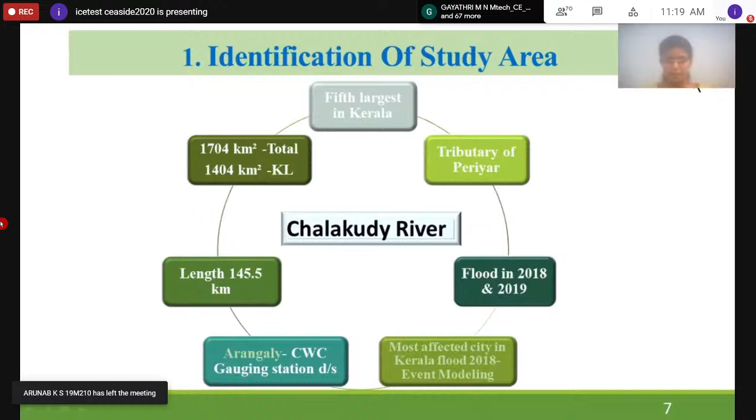It has a gauging station downstream of the town at a place called Arangaly. It is a gauging station of Central Water Commission. Chalakudy town is one of the most flood affected cities in the Kerala flood of 2018. So I have decided to do the event modeling at this study area.

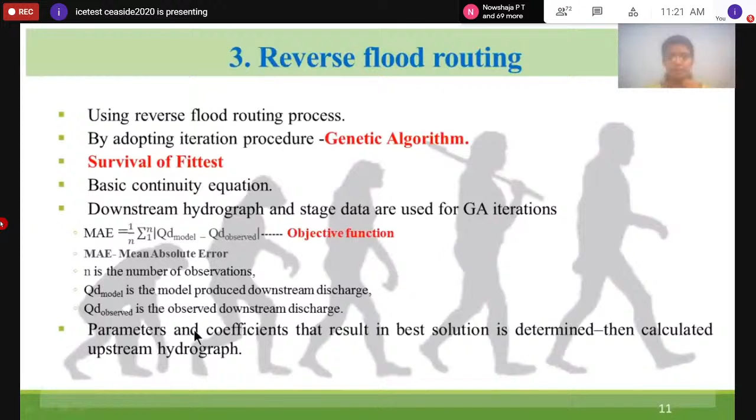About the reverse flood routing model, I use the reverse flood routing process using the iteration procedure of genetic algorithm. The basic principle of genetic algorithm is the survival of the fittest, and the basic continuity equation is used for the iterations. My objective function is to minimize the mean absolute error, that is, the difference between the downstream discharge computed by the model and the downstream discharge observed. The parameters and coefficients that result in the best solution are determined and then the upstream hydrograph is calculated.

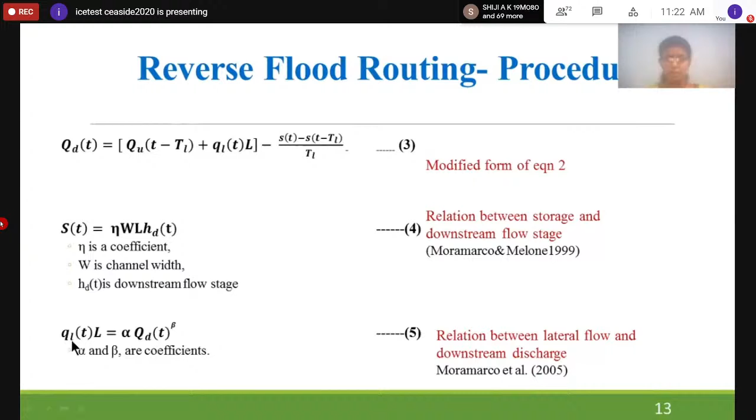Here the second equation is modified: downstream is equal to upstream plus lateral minus change in storage. The fourth equation is the relation between storage and downstream stage, and the fifth equation is the relation between lateral flow and the downstream discharge.

First of all, we'll assume the initial values, the unknown values, and then we will compute the upstream hydrograph. I will compute the storage, then compute the lateral discharge, and we'll compute the downstream hydrograph value. The downstream discharge value is equal to upstream discharge value plus lateral discharge minus storage, and I will compute the mean absolute error, which is the objective function. If this objective function is satisfied,

these optimal values of parameters and coefficients are selected for the computation of upstream hydrograph. Else, this iteration is continued using the genetic algorithm procedure, and every time the parameters and coefficient values are updated. And the best one is chosen for the computation of upstream hydrograph.

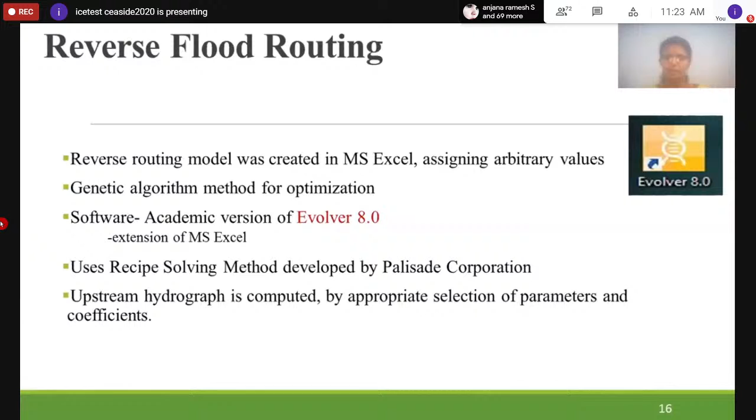Moving to the results and discussion, the reverse flood routing model was created in Excel with assigned arbitrary values. The genetic algorithm method was used for the optimization using the software Evolver 8.0. Evolver 8.0 is an extension of MS Excel and it works in the platform of MS Excel. This software uses the recipe solving method and it was developed by Palisade Corporation Limited. The upstream hydrograph is computed by the appropriate selection of parameters and coefficients obtained by using this model.

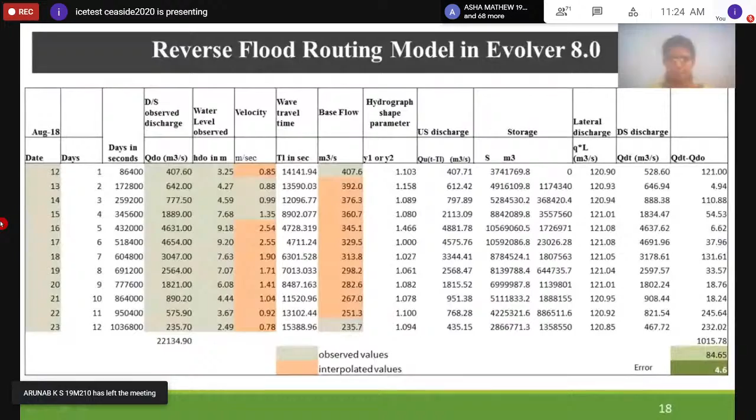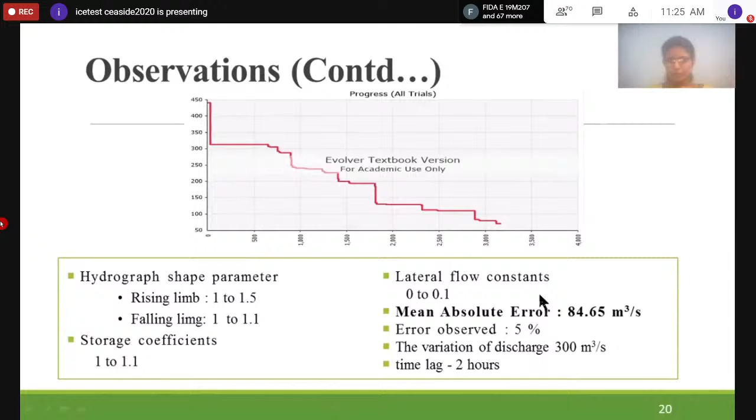There is no lateral flow in the selected reach, and the mean absolute error is 84.65 cubic meters per second, and the error observed is 5%. The variation of discharge comes to about 300 cubic meters per second, with a time lag of 2 hours. Moving to the conclusion, the reverse routing model could predict the upstream hydrograph with a mean absolute error of 84.65 cubic meters per second, and the error is less than 5%.

If there is a data deficiency, we can adopt these types of artificial intelligence techniques to get more reliable results for our studies. There are certain limitations in the study, and they arise from the assumptions used in the equations to develop the reverse routing model.